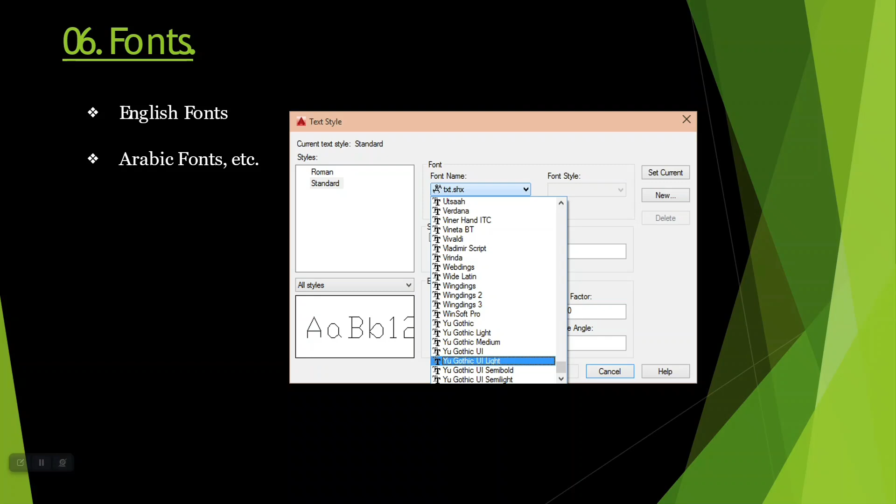When you are selecting a particular font with the help of the text style command box, you will see a preview of it. Whenever you select any font, you get a preview on the adjacent screen on the left side. You can even create your own custom font style with the help of AutoCAD and use it when making a 2D drawing or a 3D drawing.

Panels or commands which we basically use when using AutoCAD - these are the command options available in AutoCAD which allow us to implement particular options or commands through which we can create our 2D drawing or 3D model. The first one is the draw command, which contains line command, polyline command, circle command, rectangle command, arc command, spline, ellipse, and hatching command.

Modify command is basically containing certain important commands such as dragging, rotate, copy command, mirror command, chamfer, fillet, trim, scale, etc.

There is one annotation command which we will be using for annotating our 2D or 3D model with the help of text, dimensions, etc. This annotation command basically has text, dimensions such as linear dimensions, angular dimension, radius, diameter, etc.

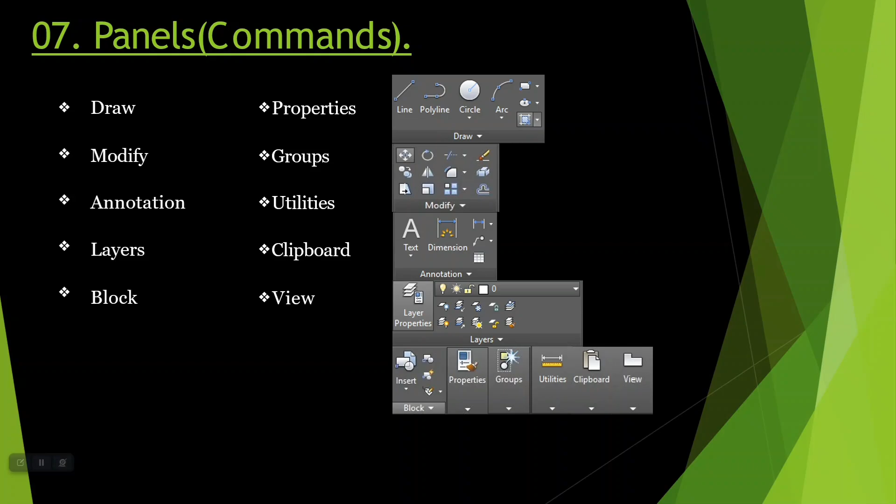So this leads to the completion of our presentation. Now we will start AutoCAD directly, and then we'll see what are the different options and things available in AutoCAD which we will be using in our next session or in upcoming classes.

So on this screen I have my Autodesk AutoCAD here. The moment I left click, you have to left double click on the Autodesk AutoCAD icon. Left double click, just wait. So this is your startup screen. It will load some plugins required to run the software. By doing this opening, we just wait, hardly 5 or 10 seconds it will take to load the layout. So this is our standard layout of AutoCAD which you get when opening Autodesk AutoCAD.

Most of the people may be aware of this, but I will take it from the beginning, from the scratch, as if nobody knows about AutoCAD.

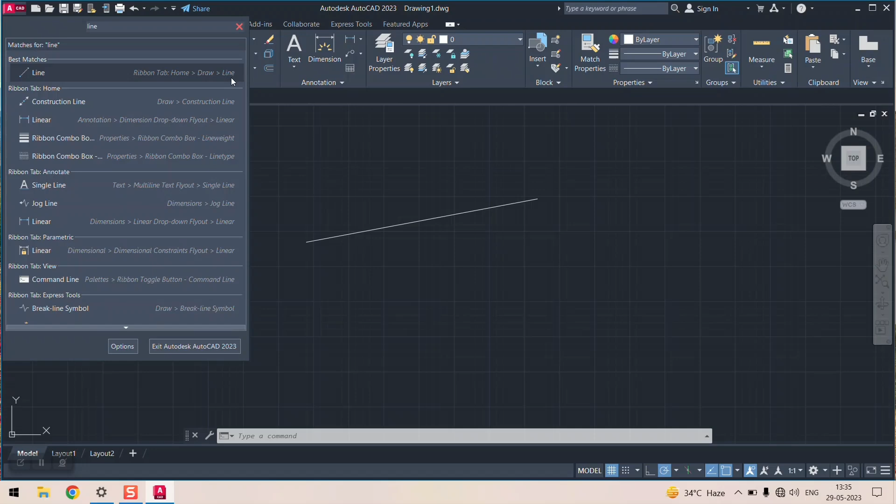This is 'line'. It simply means that you have to give the line command directly to the command line. This is your command for the standard operation you want to do. And this is the location, meaning the manual location of that particular command inside home, inside the draw command, and inside that there is a line command. If you forget where the line command is available, maybe it's in drawing, maybe it's in modify. This is just for illustration purpose, not for actual practice, just for reference.

So if you forget something, you can give it with the help of these three different ways through which you can give the command to AutoCAD.

This command line, for professional engineers, is more useful than directly going to the particular command. I'm telling you this because if you work on AutoCAD for almost 2 or 3 years, you will be completely having knowledge of all the commands available in AutoCAD. So you don't have to go directly to the particular command; you just take the help of the command line, type it down, search it, and then directly work on the particular command.

Okay, so what we will do, we will delete this thing.

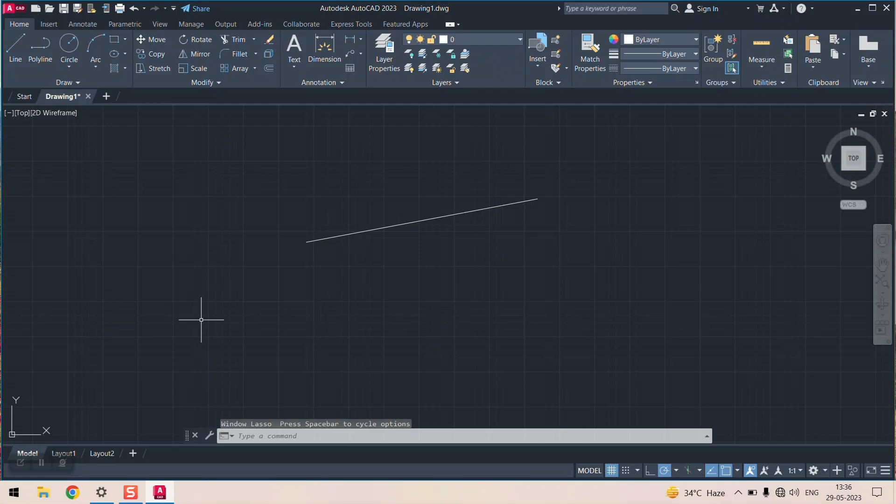So now you can see I'm scrolling, like for zooming in, you just have to scroll in with the help of your mouse. See, your coordinate system, this is your x-axis, this is your y-axis. If you are scrolling in, you are zooming in, going inside of your drawing. If you are scrolling out, you are moving out of your drawing area, it means you are zooming out. This is useful for zooming in and zooming out.

Right click is basically useful for repeating a particular command in usual practice. But there are certain other options available, like if you want to undo something, you can undo it with the help of your right click. You just click on somewhere, undo zoom. Undo zoom means it will drop you to the location where you have started.

There are certain options like isolate objects, hide objects, end object isolation, redo zoom, pan, zoom, steering wheel, quick select, quick calc, find, and options. This option we can access it with the help of the command line also. I will show you that.

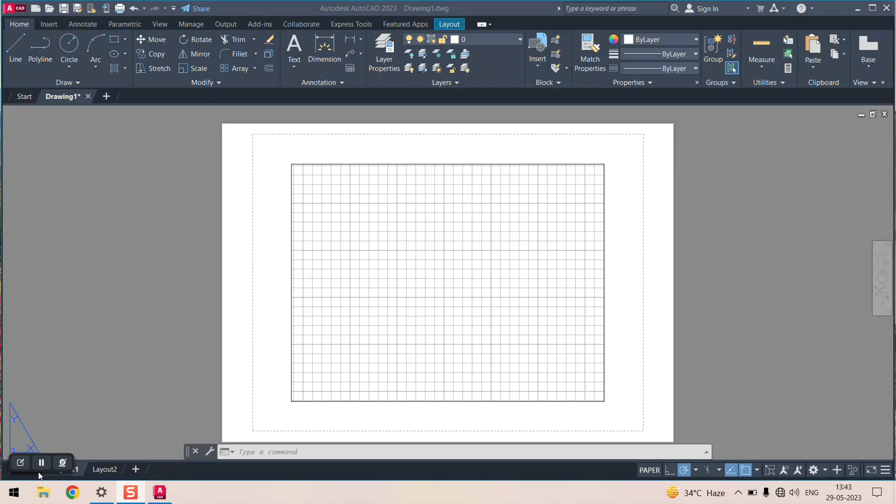After this, there are certain model or layout options available in AutoCAD. This will be useful when you're making 2D drawings. These layouts are basically useful when you're making something on the drawing area, since it will completely come directly on the paper. This will give you an idea of how your design will look on paper.

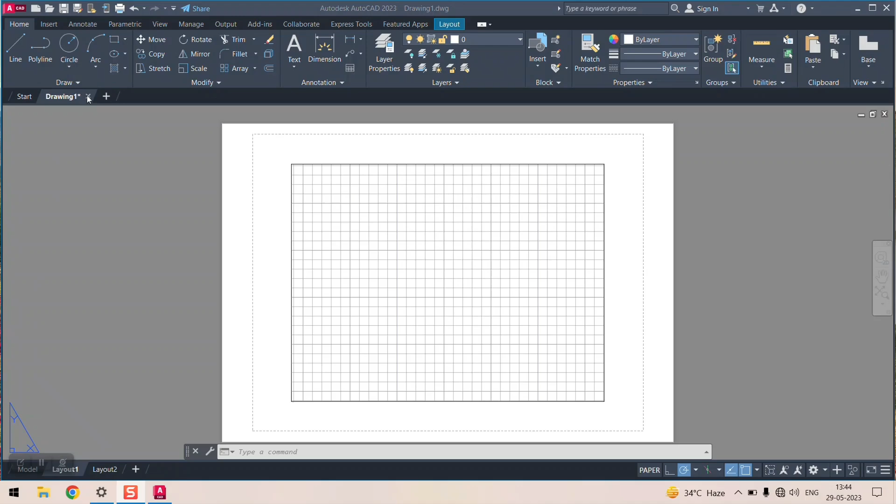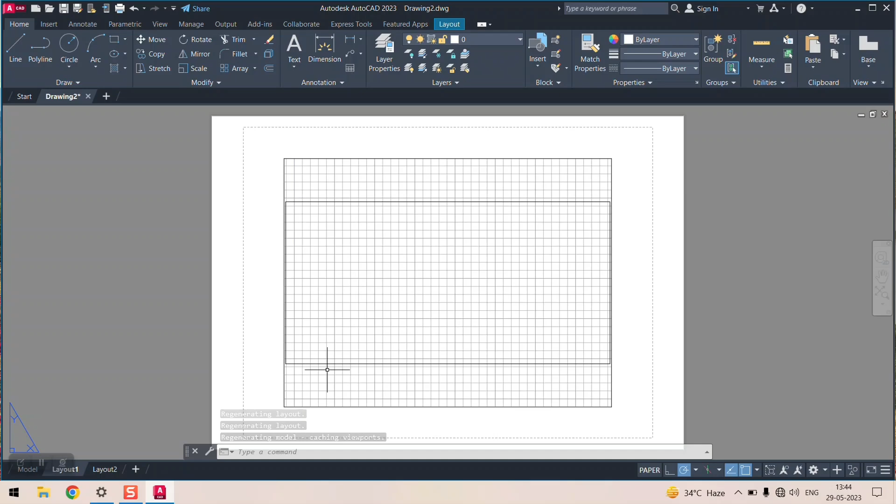So in order to visualize this, you just make a particular thing on this area, and then go to the layout section. You will see how your rectangle will look like on the particular drawing area. This is basically for representation on the paper side. So we will click on this, and then create a new one.

So these layouts are the default ones. These are the layouts which you will be seeing when you are just opening a new 2D drawing in AutoCAD.

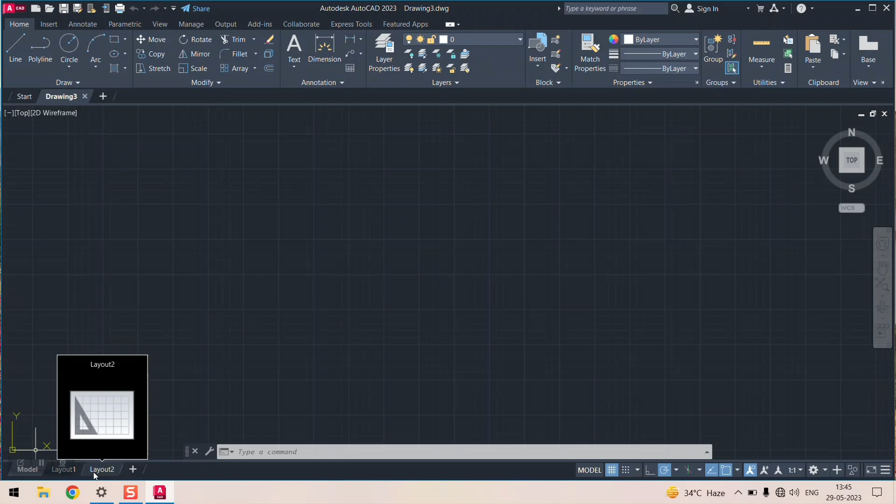There are certain other options available on the bottom right hand side. These are basically the snapping options, which are useful when you are creating, joining, or making something on the midpoint, or making something on the end point.

Let us suppose, you can see there are certain grids available on the drawing area. If you want to delete those grids, or don't want to see them, you have an option which we call displaying the drawing grid. Just click on this, and it will switch off the grid available on the drawing area. If you want to unhide the display, you just click on the same portion, and your grid will come back.

There are two options: polar snap and grid snap. Grid snap means snap settings. You can change the snap settings also, snap on or grid on.

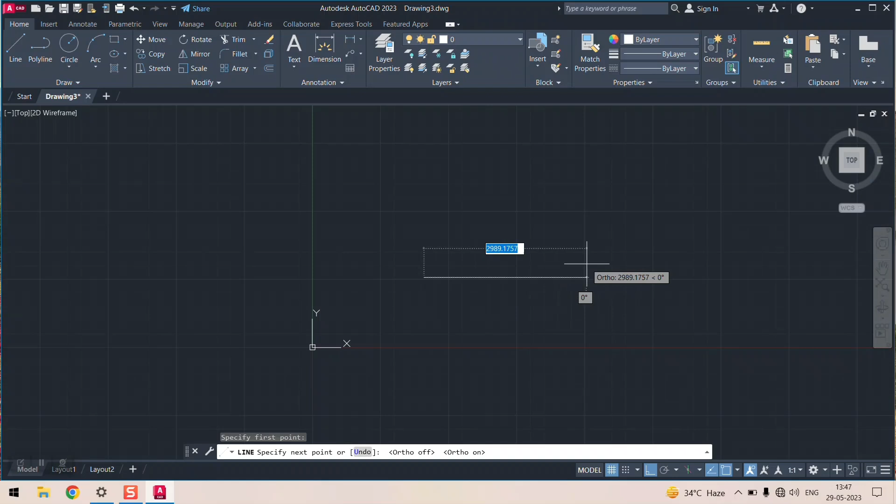There are certain snapping options available inside this particular snap cursor options, object snapping. So you will be dealing with the endpoints, midpoint, center, geometric center, node, quadrant, intersection, and extension. Most of the time you will be dealing with the endpoint, midpoint, intersection, and extension.

So these four. See, when I open AutoCAD, only this midpoint snap is not on. Most of the time AutoCAD knows these are the standard snapping options which a particular user will use most often. AutoCAD is designed to be friendlier with almost all users, whoever is using the software. So to use a particular snapping option, you have to consider these three on the top, and two for intersection and extension. We will see later how many snapping options we will be using in AutoCAD.

For selecting this snapping, you just click on the on option, and you click on the off option. If it is off, it means the options available inside will not be used. If it is on, it means the options you have checked in these snapping options will be used for the commands.

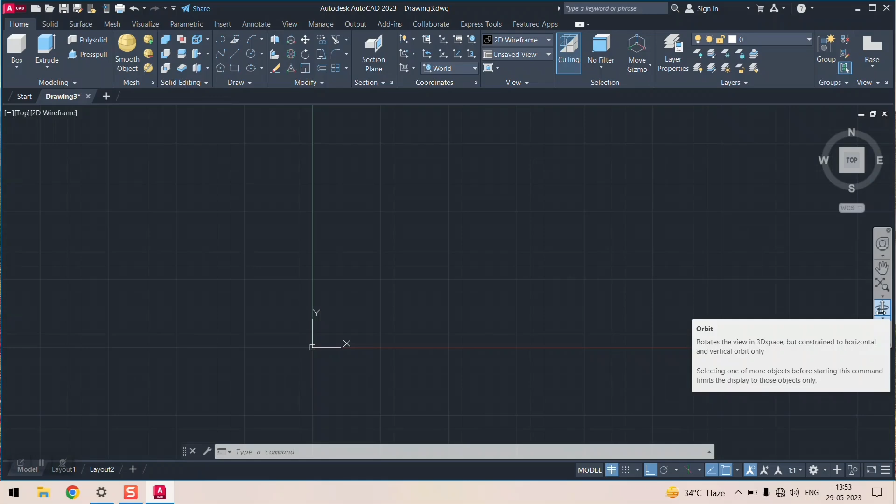So you can see from the beginning that this is the navigation control option available, with the help of which you can directly control your drawing area. This is just me rotating the drawing area. This is the 3D orbit command, for rotating the drawing area.

But if you want to come back to that particular command, you just have to press the Escape key. See, your UCS has been changed. What you have to do is just click on the top view of the drawing area, and you will come back to the main layout. So these are the particular options which are available in AutoCAD.

I just wanted to let you know, guys, that this crosshair is basically useful for selecting commands, drawing particular commands, joining two particular commands, etc. When we use standard operations of AutoCAD, we will be seeing all these things.

First we will see if you want to change the background of AutoCAD, what options you have. You just click on options in the command line, go to the display tab, then crosshair. If you want to change the background of your drawing area, you go to the display file tabs, where there is a color option available.

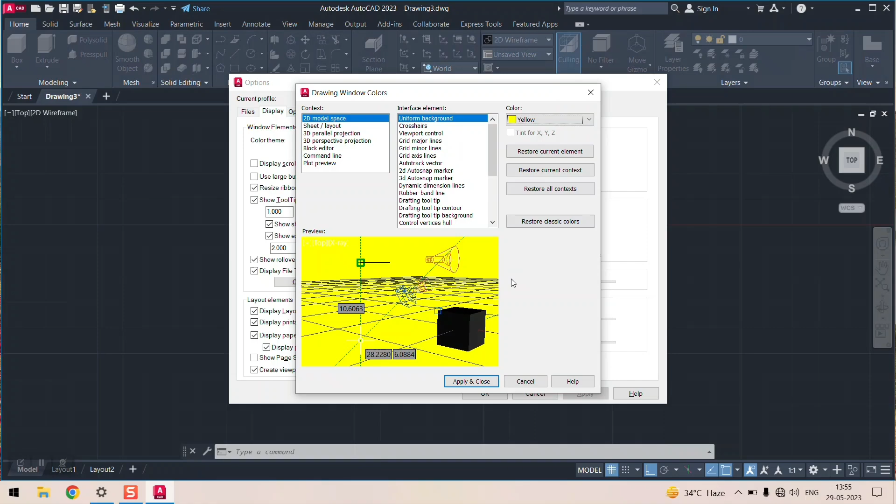You go to it, and uniform background is available. If you want to change your uniform background to yellow, click apply and okay. You see your background has been changed to yellow color.

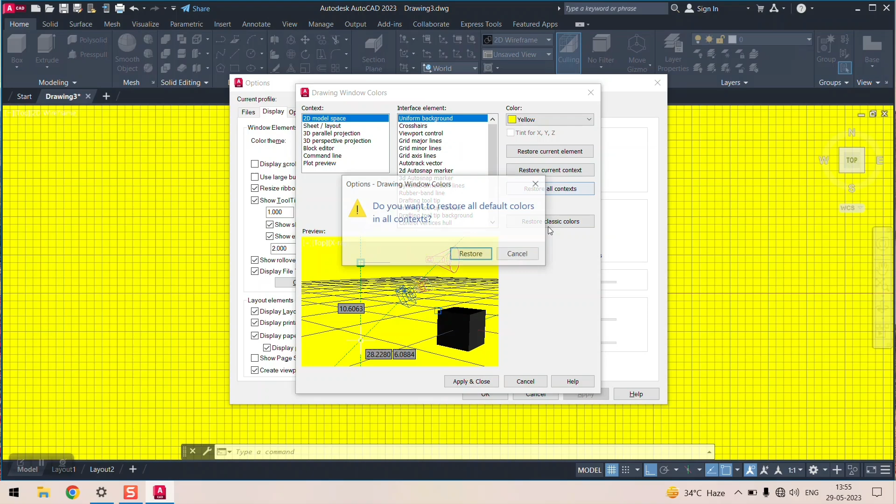If you want to reset the color, you just go back to options, colors, and restore all context, restore, apply, and okay. This is the option available for changing the color of the background.

There are certain different options available inside that. If you want to change the uniform background color, you can change it with the crosshair command. If you want to change the color of your crosshair from white to any other color, you can do it. Viewport control color lets you change the major lines, minor lines, axis lines - these are the different options available through which you can change color.

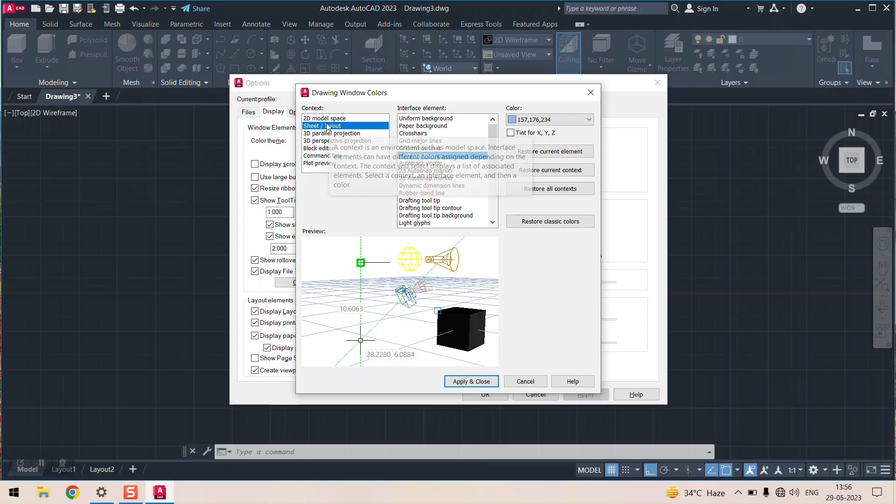Sheet and layout, also you can do it there. In 3D parallel projections also you can do it. These are the major contexts available where you can change the color.

There is one particular option with the help of which you can change the size of your crosshair. The crosshair we are using here is a smaller one. If you want to increase the size, let's suppose to 50 - see, the crosshair is increased.

If you want to change it back to the original form, go to the same options, just make it 5, since 5 was the standard size. You can come back from wherever you want to change anything with the help of the reset options, or you can remember the value before changing and put the same value back.

There are certain options available with the help of which you can change the fonts. You can change the entire texting format of your AutoCAD. The basic formats available include monospace, Lucida Console - only a few options available.